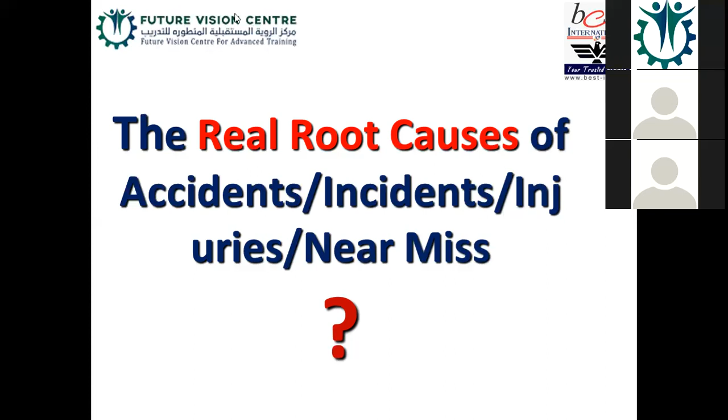Lots of examples I have in my mind, sir. Many people, because I'm working in the field, so I know there are people always using shortcuts, always trying to do shortcuts, and that is the biggest issue on the sites. That will always have some kind of problem - accident, incident, injury - because of using shortcuts. Mostly 90% of cases I found on the site, people trying to do this did not go the right way. He always tried to be too short. That is the problem.

Most brilliant, I agree with that. Brilliant. Mostly it's also human behavior and unsafe act. These people are not totally aware regarding safety. They know safety, but they did not know what is safety. Yes, also that.

Brilliant. And any lack of opinion, knowledge, guys? Also lack of trainings, that is also an issue. Unauthorized persons, that is also a root cause for incident and injury.

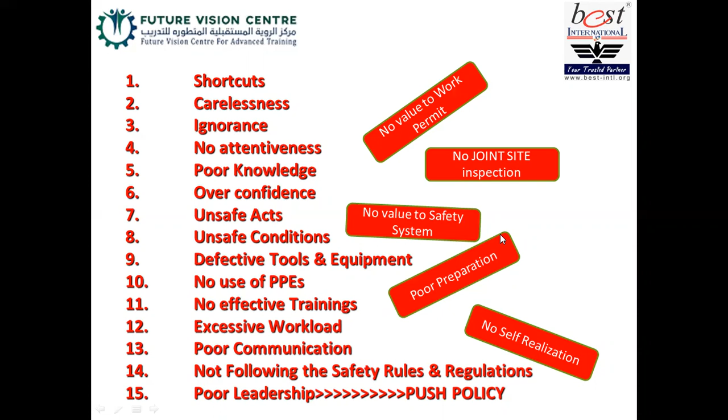And nowadays a lot of soft skills are important. Maybe at the end I'll share the list of what business soft skills in trainings became important, even more than safety trainings, I would say.

So guys, this was all about open discussion: why accidents are still happening, what are the underlying or real root causes. And any construction safety manual or any kind of theories will not work if those reasons are still existing within your company.

Because these are rules basically. Any procedure, any manual, any kind of policy you are writing, you are giving a direction. You are telling people, okay, do this, do this, do this, through this way, this is the safest way to complete it. But if their mindset is not changed, or they don't realize, or they hate the safety department, or they hate safety rules, all these materials will not be effective.

Even if you become knowledgeable after today's training, you'll get plenty of information, but it will still be useless if you are unable to change the mindset. First of all, your mindset, then your trickle-down effect to the minds of others.

So the biggest important chapter, I would say, the general safety within CSM, Construction Safety Manual of Saudi Aramco, is all about emergency response, reporting and response.

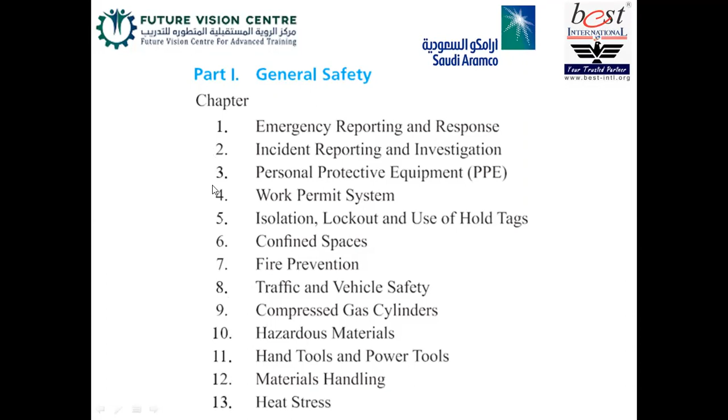Okay guys, in the construction industry, civil area is very much important, like excavation, shoring, scaffolding, ladders and step ladders, temporary walking and working surfaces, fall protection. So let's talk about excavation. What do you think? What kind of hazards could be there? Excavation is a process, right? So before, during, and after, what is the possible strategy?

The most dangerous hazard is the cave-in. So that means the cave-in in excavation, the underground excavation has cables, underground cable, toxic utility gases. And imagine if unqualified people are working and heavy equipment is not tested properly, or the backhoe is not right, or operators are not certified or trained.

So many hazards that happen, sir. Right, that is why we need technical implementations like shoring, venting, shielding, sloping. That's why we have a pre-excavation checklist. That is why we have a permit system whenever an excavated area is deeper than 4 feet. That is why we make sure we have civil engineers, geological engineers, mud engineers working with us, to understand the type of soil, because the type of soil decides what method will help us keep our people safe, so it doesn't cave in.

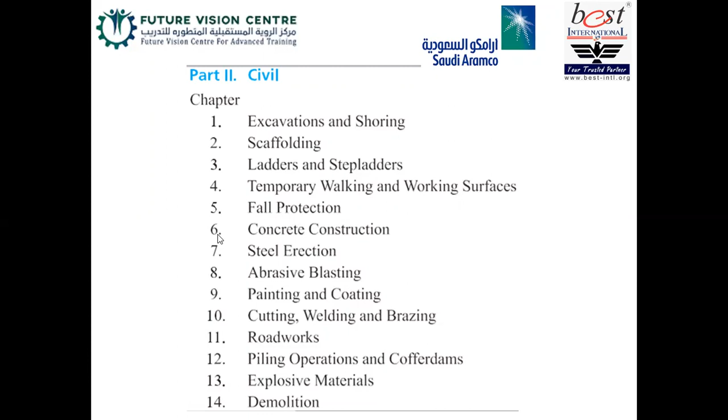Some mechanical and electrical hazards exist because machine guarding is needed. Make sure any moving part up to 8.2 feet, if present, must be guarded. I repeat, any moving part up to 8.2 feet must be guarded as per Saudi Aramco. That means there shouldn't be any moving part without a guard. It can be a grinding wheel, a fly wheel, or any moving part.

Same way, for mechanical and heavy equipment, we need to make sure proper certified staff is there for any mechanical or electrical hazard, including underground cables and overhead power lines. We also have better control in the shape of daily inspections, qualified crane operators or heavy equipment operators, and equipment with third-party inspection to maintain them well.

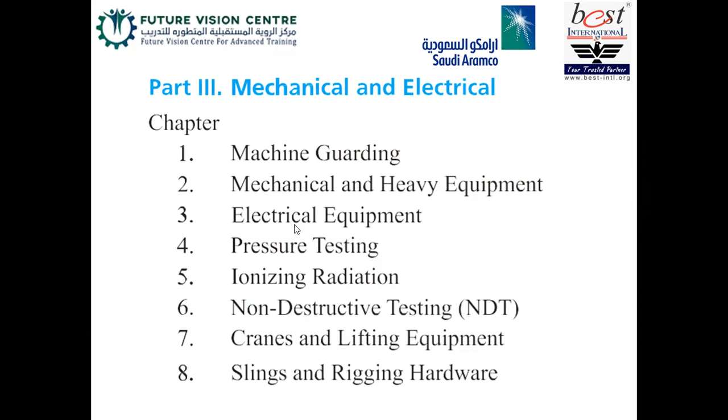So guys, until now we have summarized how the construction safety manual is helping us to understand the key points of safety, so we can avoid any sort of incident or accident during our construction projects or even any activity within Aramco. We have discussed the real root causes already.

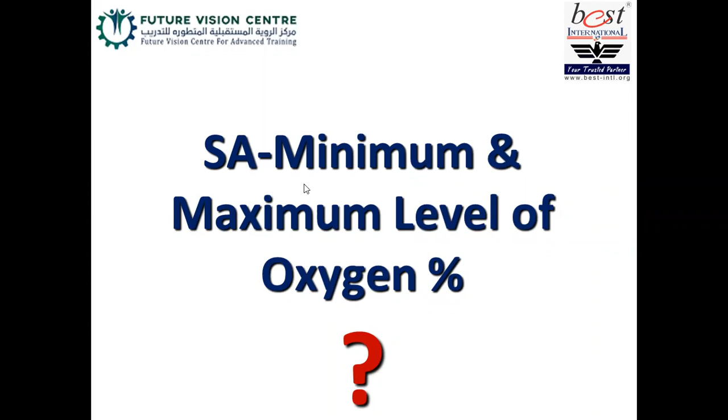H2S permissible exposure limit is only below 10 ppm. Above that, certain requirements are in place. We need proper permissions from different staff. Same way, carbon monoxide below 35 ppm for 8 hours, but from 35 to 1000 ppm, again we need proper permissions from the division head, and from 1000 ppm onward, no entry, no work allowed. Same way, at 100 ppm of H2S, no work.

Even at 20 ppm, Aramco stops the work. LEL below 5%, first of all above 0%, no hot work. That surely you have to remember. Above 0%, no hot work is allowed, especially in confined spaces.

And below 5%, cold work is allowed without SCBA, self-contained breathing apparatus. But from 5% to 10%, if you are still going to work, it should be cold work, and make sure you have SCBA, because at 5 to 10% LEL, you need SCBA or SABA, supplied air breathing apparatus or self-contained breathing apparatus. Now, at 10% or above, no entry, not allowed.

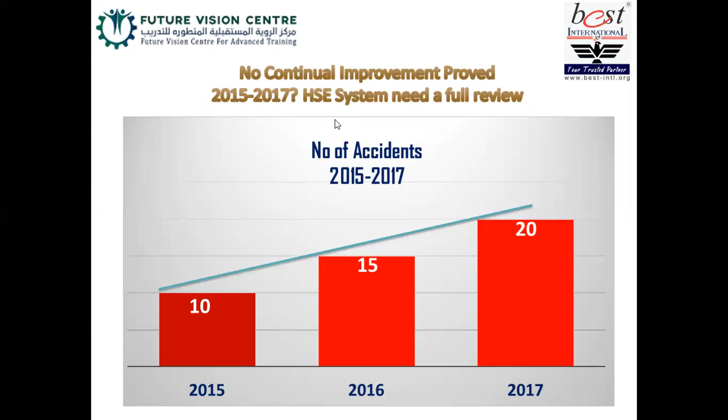Surely it will not help. That is why I always encourage: be honest. Be honest, whatever the situation is. Don't tell a lie. Because honesty is the best policy. Otherwise, these golden words would never have been invented.

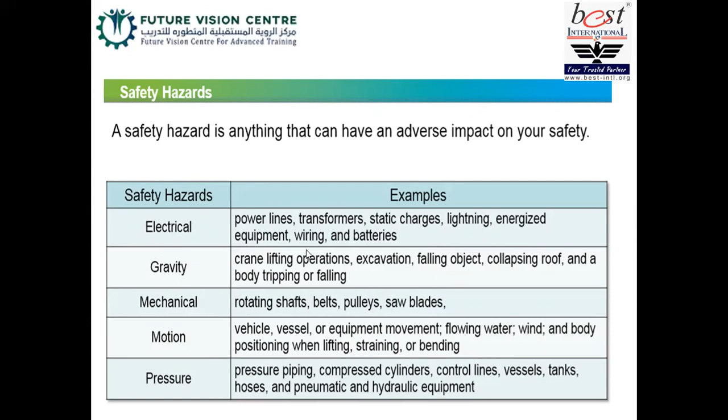Now, as per Aramco, normally the hazards we face are categorized into two groups: safety hazards and health hazards. Safety hazard is anything with adverse impact on your safety, with 5 subcategories like electrical, gravity, mechanical, motion and pressure, with different examples given. Same way, health hazards are anything that can have adverse impact on your health, also having subcategories like biological, chemical, radiation, noise and vibration, and temperature.

So we discuss everything, but biological - this COVID-19, this coronavirus, is a biological hazard. One example of biological hazard. And because of this invisible enemy, the whole world is in trouble, right? Same way chemical could be in form of dust, fumes; same way radiation - we have X-rays, microwave, solar rays, welding arc, even naturally occurring radioactive materials. Noise and vibration, that's another hazard. Same way we have temperature.

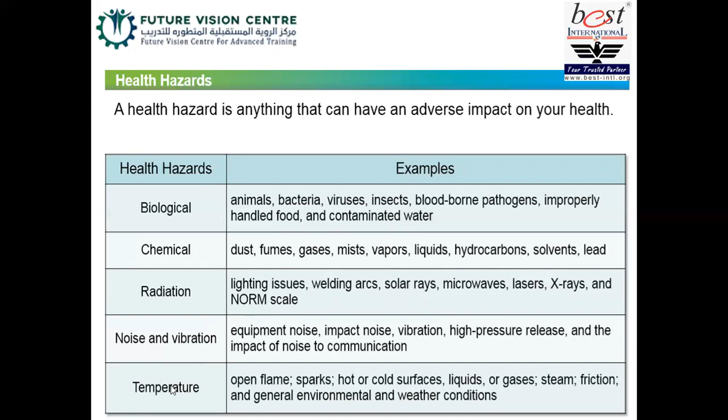So for the last activity of today's training, I truly want everyone to put a little more energy and join me for this exercise on how to identify hazards practically. I will show you one picture, and let me know how you reply in the chat box what the hazards are. Look at picture number 1. Let me know if you can easily identify the hazards here, or you can unmute your mic and speak up.

Yes, guys, what do you think? Any hazard here?

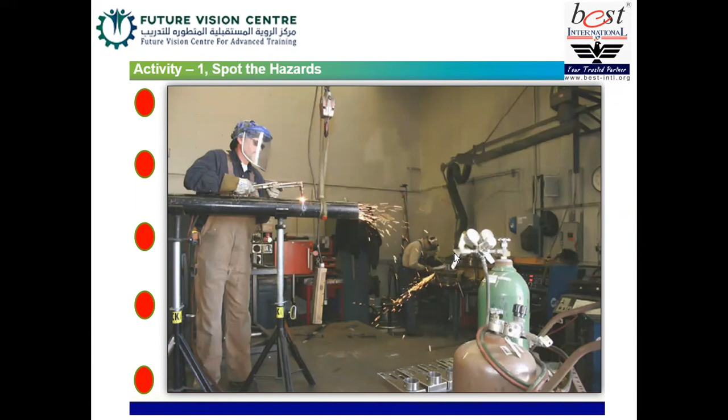And do you think there's any mechanical hazard? Yes, there's a lot of machines also. What about pressure hazard? The pipe is not properly secured. What about pressure hazard? Like this compressed gas cylinder is a ticking bomb. That means pressure hazard is also there. So this is what you have to do in each picture. Look at another one.

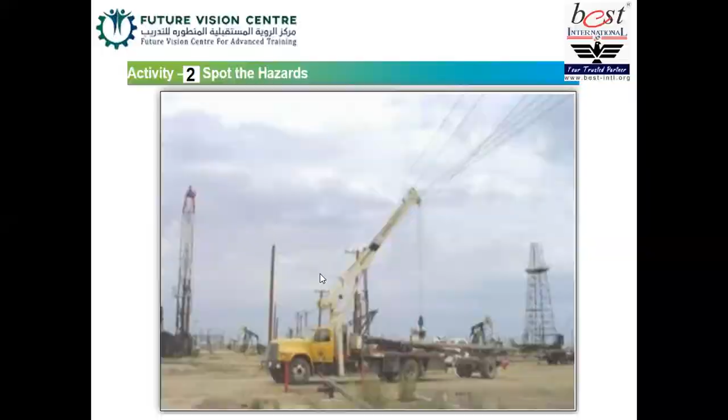So we have electrical hazard because of overhead power lines. And it might be that this crane operator is not certified, not trained, no verification. So many other hazards we can identify, but the visible hazard is electrical. Take another picture.

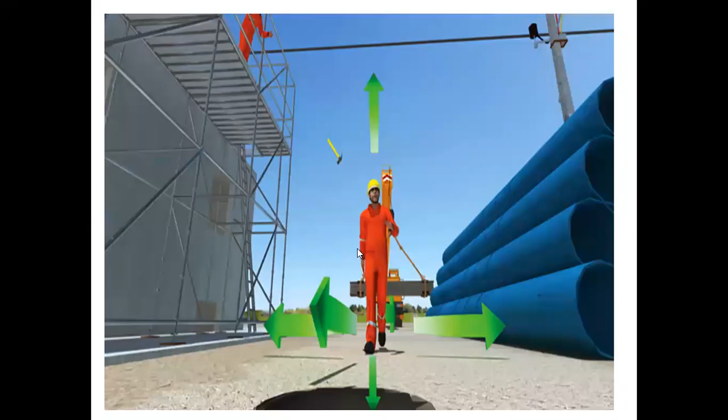Sometimes people say safety is a common sense. But what if they don't use their common sense? Take another picture. So don't accept blindly any sort of unsafe condition or unsafe acts here, because acceptance is the biggest issue. If you accept blindly everything bad or wrong at your site, then your role is over.